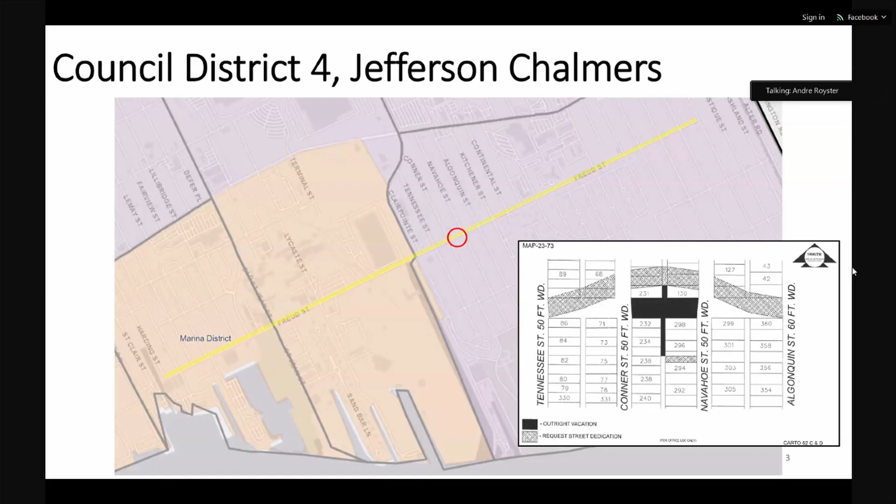Here's an aerial and zoning map of the area. The area is zoned primarily R2. To the bottom left of the image is the existing Freud pump station, also zoned R2. There's a former corner store near the intersection that's since been demolished, and another corner store to the southwest. This may have been a commercial node for the neighborhood historically, given that Freud is a collector between three neighborhoods.

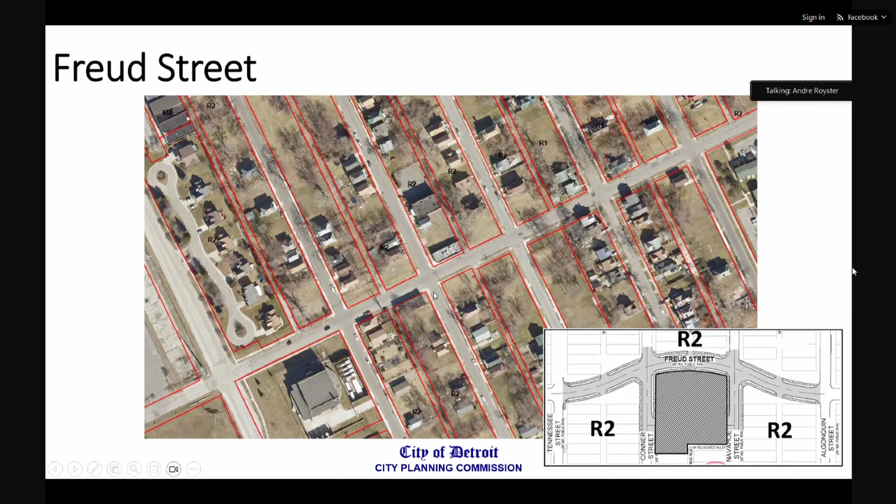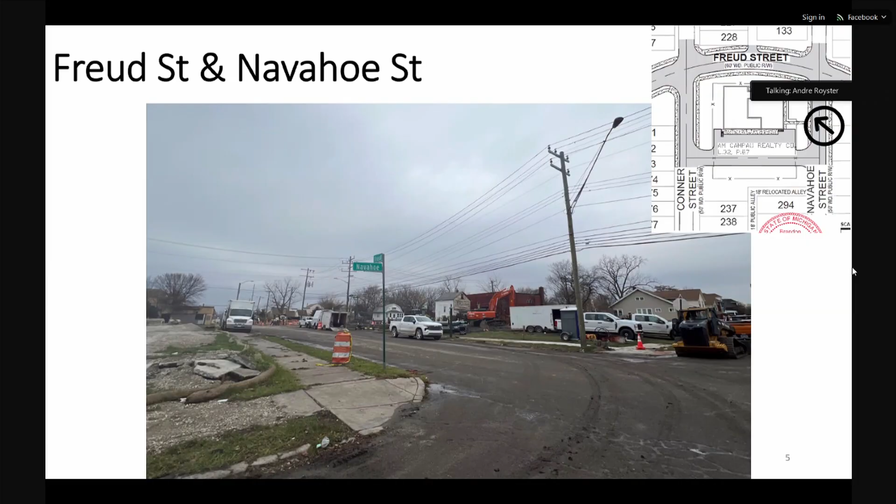Some images from November. This is looking northwest at the development site and the portion of the road that would be removed and rerouted to the north, where the trucks are. We understand that the work occurring in this area now is utility work related to the road reroute project, not specifically to the proposed pump station.

This is looking east down Freud from Clairpointe. This is the existing Freud pump station, showing that it's one block from the proposed pump station.

Quick background: the existing pump station was constructed in 1954. It's a combined station that manages both sanitary and stormwater.

There are existing parallel relief sewers below Freud Street in this location, coming from Algonquin to the north and Freud to the east. Because these relief sewers parallel themselves here, this is what's brought GLWA before you for the proposed development. That development would allow GLWA to do two things. First, and primarily, they would be able to isolate or block these two relief sewers from the existing pump station during dry weather so that the existing pump station can be maintained in service. And then the new proposed pump station would direct sanitary flow to the north down Navahoe to the Detroit Regional Interceptor along Jefferson.

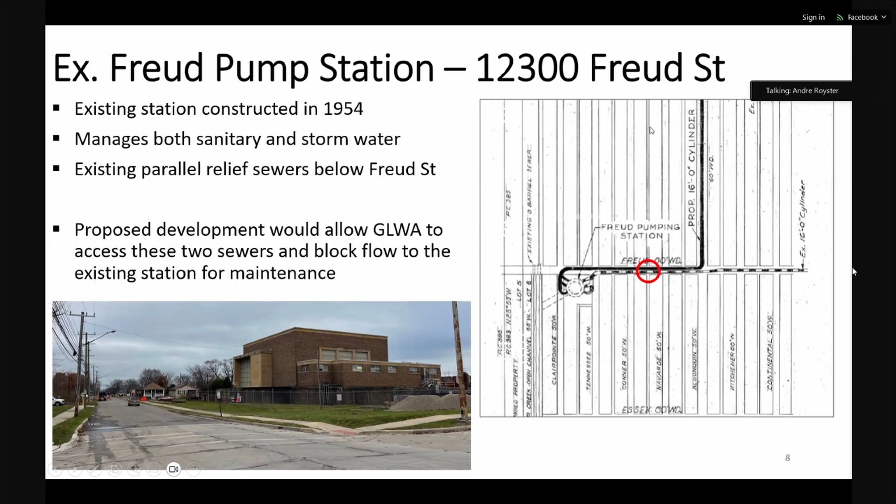So the zoning proposal is to rezone from R2 to R5. That's the first district that permits major utility pumping stations. If the rezoning is approved, conditional use approval would also be required, including site plan review.

Here's an image of GLWA's proposed site plan, including the rerouted Freud Street and site improvements, with quite a bit of greenery surrounding the immediate site. The building would be oriented to the west towards the existing pump station and would be 47 feet tall.

There would be a fenced parking lot to the south, as well as bioretention along the perimeter and fencing around the site. It's unclear if these off-site improvements, the street trees and the landscaping, would be installed by GLWA or the city. At the last meeting, it was discussed if there's an opportunity to add a small park at either end of the development. That would likely need to be pursued by a city department rather than GLWA, so that can be discussed further if desired.

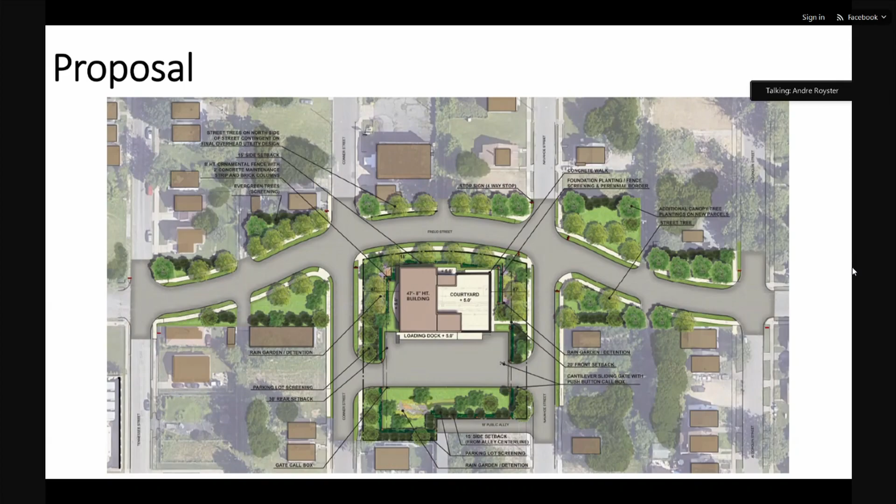During the vacation reroute process, there was significant engagement done by GLWA, with a focus on the building design. The images on the left are a previous building design that was proposed, mimicking the existing Freud station, and on the bottom right is a later rendering from this past summer with more brickwork and facade changes. We understand these are still working elevations.

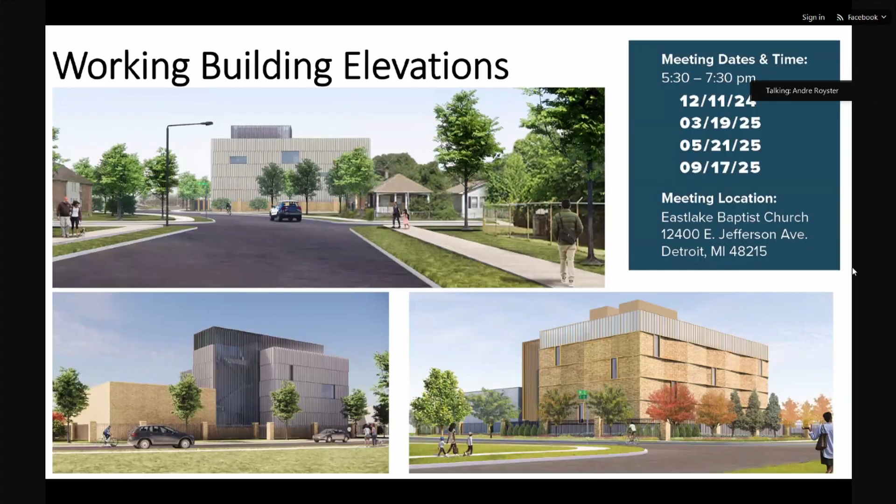GLWA has had a series of ongoing meetings. They had a meeting this past December 11, and they'll have another community meeting on March 19. So we provided a status report to the commission. No staff recommendation is provided at this time.

There were two main points of discussion in November: first, if the proposed location is the only option for the project, and second, how the proposal would help mitigate flooding. GLWA will hope to address these two items in their presentation, and a reminder that they've stated there's a need for the proposed pump station to be as close to the existing pump station for effectiveness.

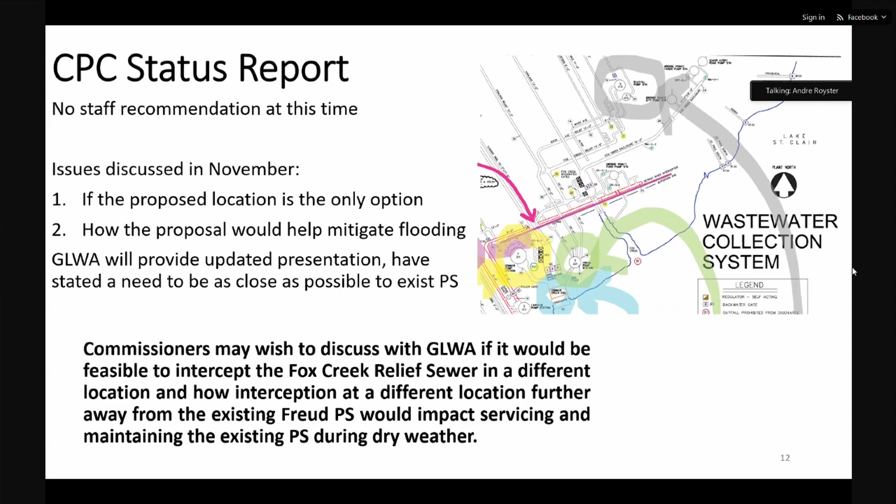In our status report, we have a prompt for the commissioners that they may wish to discuss with GLWA: if it would be feasible to intercept the Fox Creek relief sewer in a different location, and how interception at a different location, potentially further away from the existing station, would impact servicing and maintaining the existing pumping station during dry weather. So, looking at a little more detail along this train of thought...

This is a sewer map, so it isn't to scale or showing street locations, but is intended to show the system in more detail. Both relief sewers that the proposed pump station would intercept originate to the north of East Jefferson Avenue.

The Ashland relief sewer at the top, which I believe runs to 7 Mile, predates the Fox Creek relief sewer, which runs to the northeast.

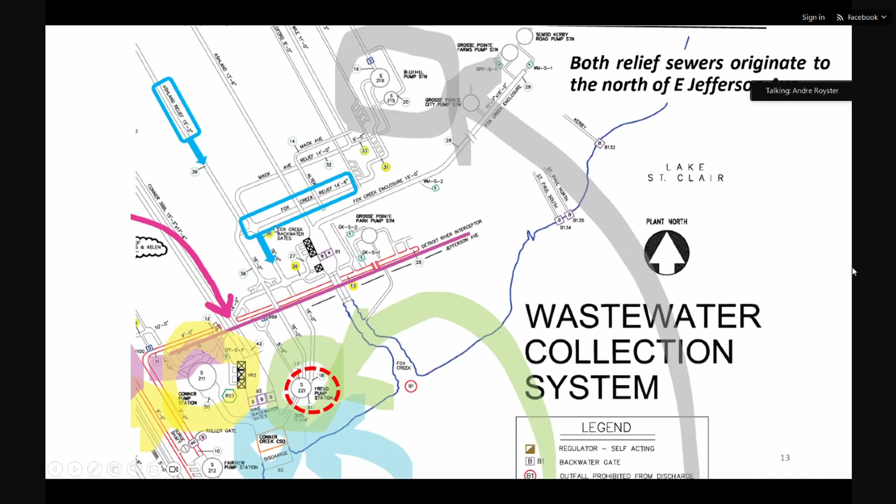There's an additional relief sewer called the Jefferson Avenue East Relief Sewer, which carries combined flow from the Ashland Relief Sewer, the Fox Creek Relief Sewer, and the Mack Avenue Relief Sewer via the Fox Creek enclosure. It serves as a collector point for these three relief sewers, and then takes flow down Jefferson Avenue to the Conner Creek pump station, shown with the bigger red circle.

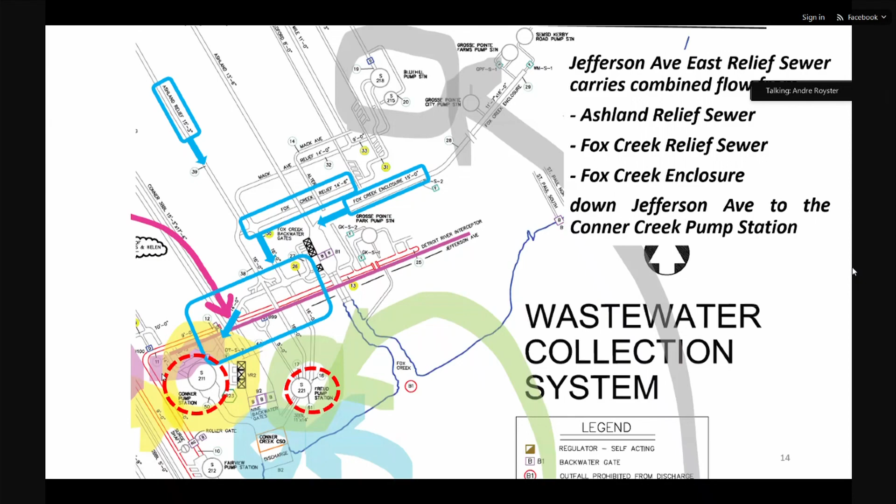We thought it might be productive to focus first or primarily on the Fox Creek relief sewer for discussion. This relief sewer flows first to the Jefferson Avenue East relief sewer to reach the Conner pump station, so it bypasses Freud under this scenario.

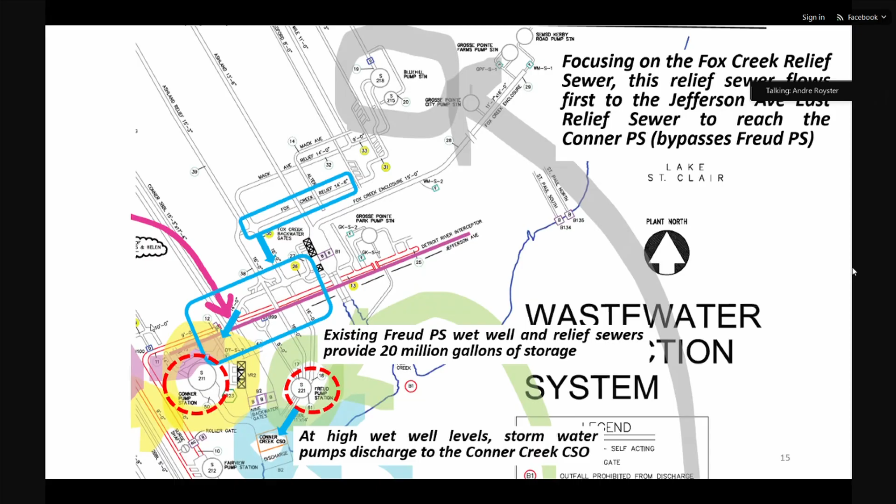A weir, or concrete wall, exists within the Fox Creek relief sewer where it meets the Jefferson Avenue East relief sewer. So flow, which would be stormwater flow during a rain event, must top this weir to enter the Fox Creek relief sewer that flows south of Jefferson. At this point there appear to be two options for flow: first to Conner pump, and then if there's a greater level of flow, it would cross over this weir to travel south of Jefferson, where it would then enter the Freud pump station.

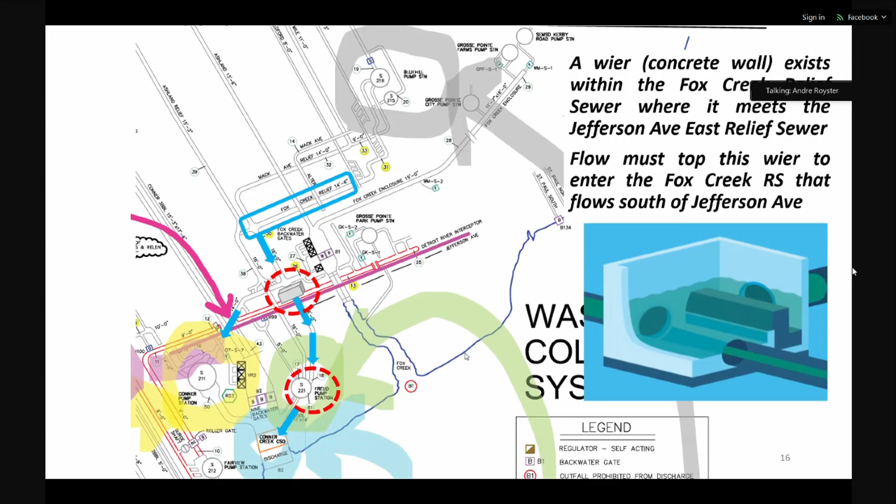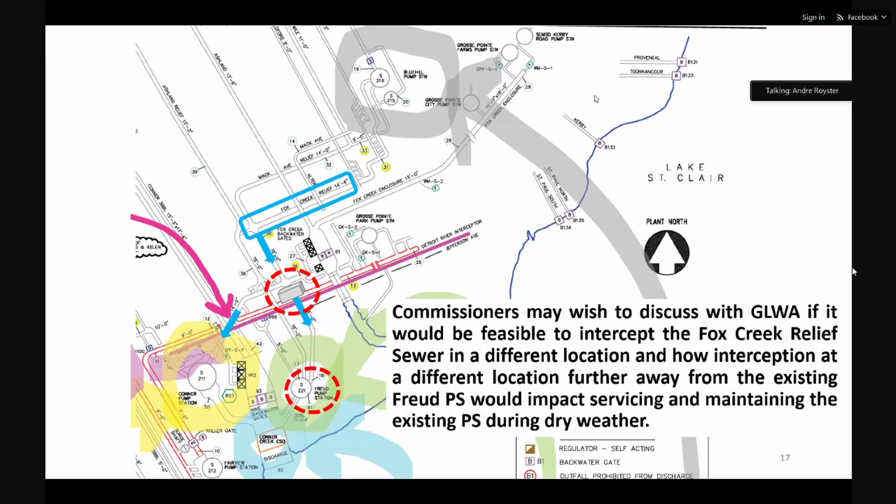So again, that's just a quick summary of our thinking with the status report. If that's something you'd like to discuss with GLWA, that's all I have, and we'll turn it over to GLWA for their presentation. Thank you.

Thank you. And if I can just ask a brief question, because this is R2 to R5 or PD, can you kind of go over the pros and cons and differences between those two?

Yes, we're not really focused on PD at this point. That would be something that would involve additional criteria, an additional level of review, but it's an option that's available to the commission if that would be desired.

And the main benefit of PD is that you can attach a site plan or development plan to the project, as well as conditions. With this project, with pumping stations requiring conditional use approval, that would be a similar opportunity, not through the commission, but through BSEED with the R5 conditional use. That would also include a site plan approval, and then they could attach conditions to the project through that process as well. But for master plan interpretation purposes, PDD only provided the interpretation for R5, not for PD.

So we could look to do that at the next meeting if you'd like. Okay. If others require it, I was just curious.

And then I know in the last meeting we talked about the vacation that I think is currently taking place. And in this alternative scenario, if we kind of get into that, how would that vacation that's already underway be impacted? Yeah, it's a good point.

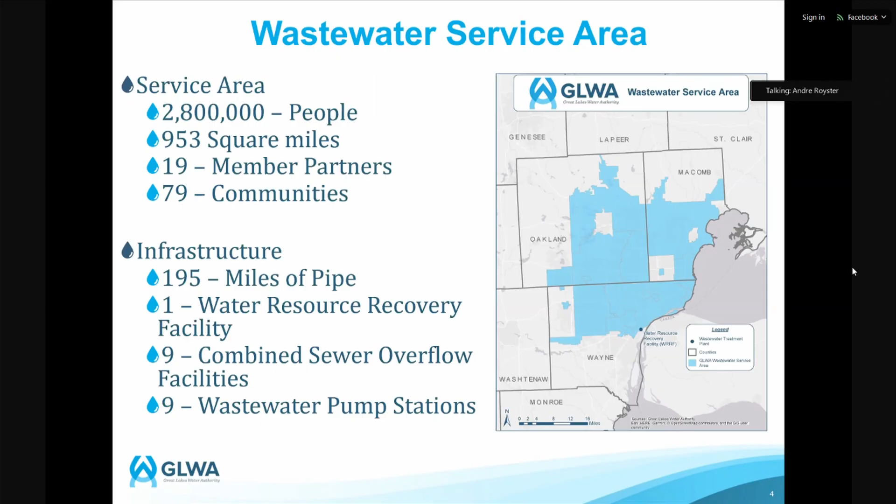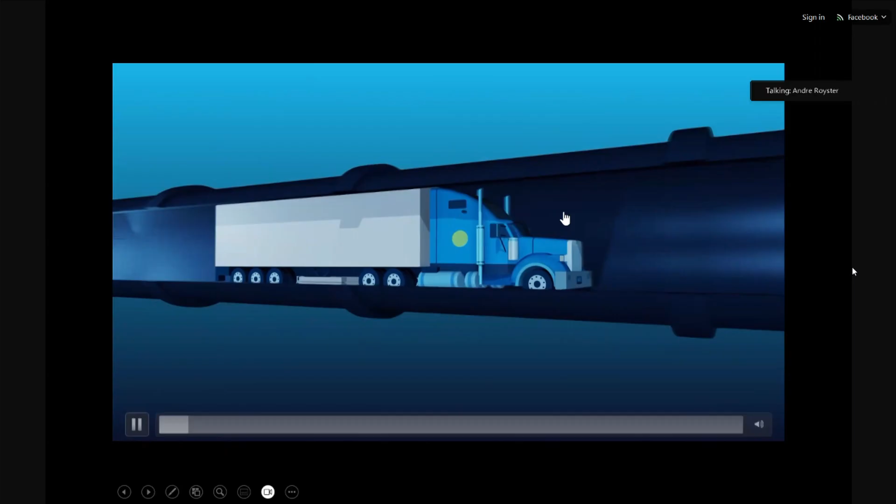You have some? Is the computer volume on? Is this a public video - is it located on the website or somewhere like that as well? We do have it on our website, accessible there. But you may have to stop sharing and then share again with sound so the music comes through.

While you're pulling that up. Oh, you got it. Okay.

Pipes are more than 17 feet in diameter and extend more than 195 miles. They are so big, you could drive a semi-truck through them.

When it rains... can you turn your mic? It might be your mic.

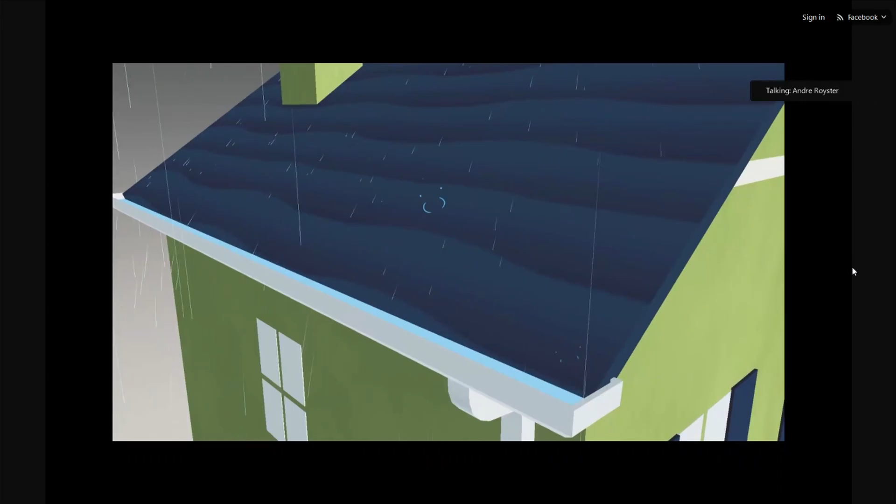Stormwater is rainfall that makes its way into waterways and also sometimes into sewer systems. The rainfall flows from the roofs of buildings and pavement, such as driveways, parking lots, and roads. It also flows over the ground when water is not absorbed by soil or plants.

A lot of older communities and metropolitan areas have buildings and homes constructed before the 1950s. These older homes may have connections that carry stormwater from the roof or groundwater around the home into a sewer lateral that flows into the sewer network. These are called combined sewers.

Modern homes constructed later than the 1950s don't combine stormwater with wastewater. Modern systems are called separated sewer systems. In separated sewer systems, stormwater flows through dedicated pipes directly into local rivers and streams and never mixes with wastewater.

Our regional system receives flow from both combined and separated systems, making it a combined system. Each day, the average flow of wastewater through our sewer system is more than 500 million gallons. So on normal days, that's the equivalent of filling up Ford Field approximately 1.5 times, and during large storm events, filling up Ford Field more than 5 times.

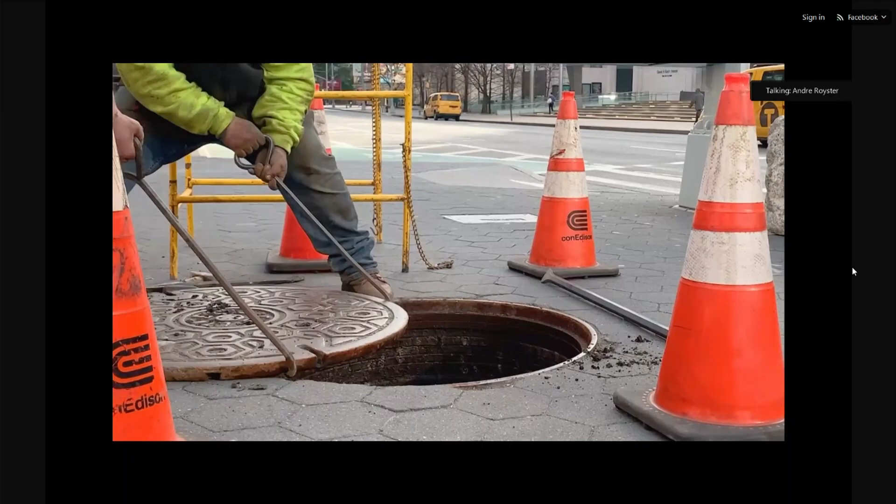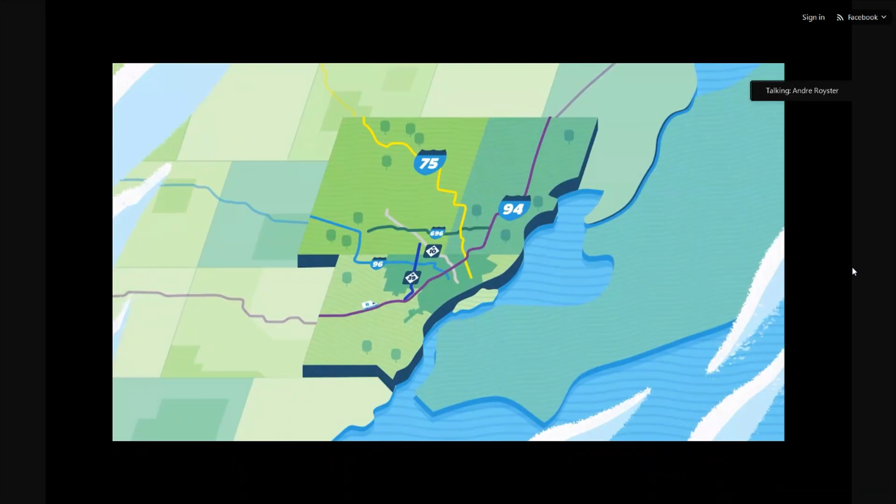The member partner communities within the GLWA service area maintain the neighborhood sewers. The only evidence of these neighborhood sewers may be manholes that provide access for workers to inspect, repair, and keep the sewers clean. The storm sewers that serve areas such as I-75 and I-94 are the responsibility of the Michigan Department of Transportation. The drainage from these areas flows to either natural waterways or into the neighborhood sewers, eventually making their way to the GLWA regional sewer system.

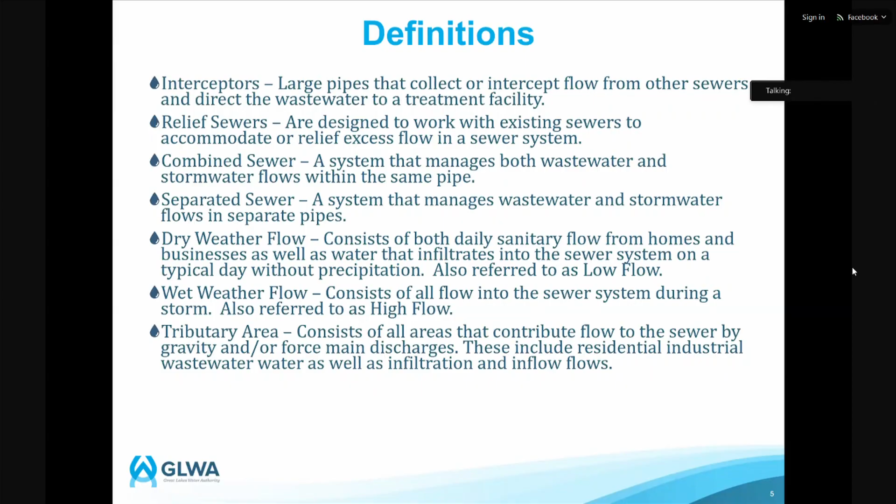So now to actually get into our system.

Looking at this slide, the tributary area we separated at the request of the commission — what is our separated system and what is our combined? The blue shading shown here is about 76% of our tributary area, which is separated. About 24% of the area, identified in red, is combined.

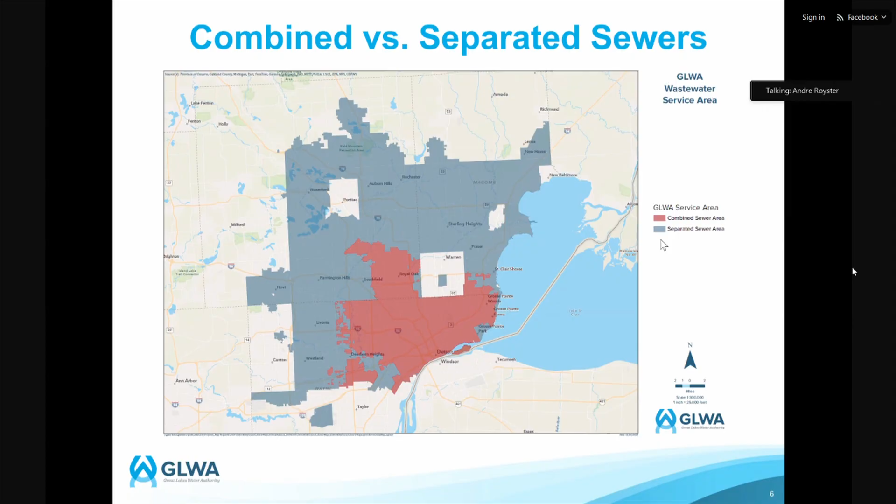What should be noted is that a significant amount of water that we receive in our system — approximately 80% of the wet weather that we handle in our entire system — is contributed by the 24% of the area that we service. So the rainwater from the combined systems is significant just because of the potential opportunities for it to get into the system.

Now to look underneath, what's happening underneath the ground: we collect flow through 3 major interceptors to serve those 2.8 million people that we had identified. The interceptors, as I indicated in the definition, are what collect the flows from the lateral sewers.

What you see in the graphic, the green lines are not roads and streets, although they run very commonly in parallel within the right-of-way. Those are sewers managed by DWSD, specifically in the yellow shaded area, as part of the Detroit system. Those have interconnections to the regional system, shown in the 3 red lines, which are the 3 major interceptors that collect flow and bring it down to the centralized facility.

The far right is the Detroit River Interceptor, the Northeast Interceptor, and then the Northwest Interceptor. Additionally, this graphic shows specific locations where communities outside of the City of Detroit only have one or two connection points where they enter flows into our system. The majority of the City of Detroit has multiple connections because of the way the infrastructure was built, but outside communities are only introducing flow at specific points within our interceptors.

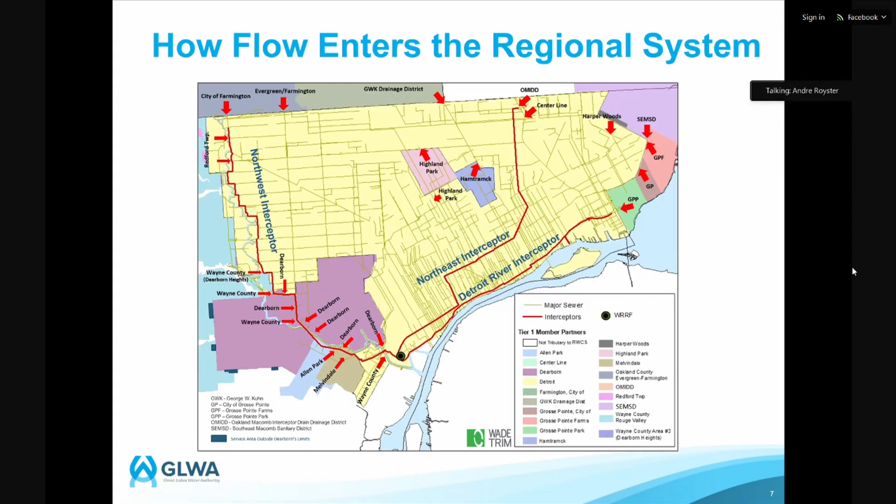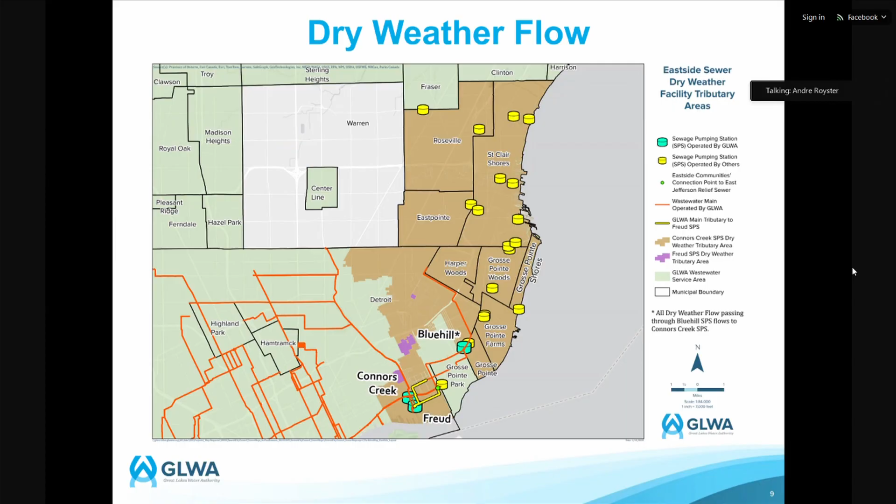In addition to this map, what you see here is the dry weather flow contribution. There are 3 major pump stations that Great Lakes Water Authority operates within the east side: Bluehill Pump Station, Connors Creek Pump Station, and the Freud Pump Station. All these pump stations have a sanitary component and a wet weather component, which we refer to as storm component.

The reason you don't see a shading color relating to the Bluehill Pump Station is because what Bluehill does is lift flow from a low point area and discharge it to the Connors Creek Pump Station, which then pumps it down to the Water Resource Recovery Facility. That's why you see two color representations of dry weather flow. The brown represents what goes to the Connors Creek Sanitary Pump Station, while the purple, and this is where we're getting to the specifics of the purpose of this project, represents what is contributing dry weather flow as it relates to residential or industrial usage to the Freud Pump Station.

All that flow is coming in 24/7 - rain or dry, that volume of water is coming down the pipe.

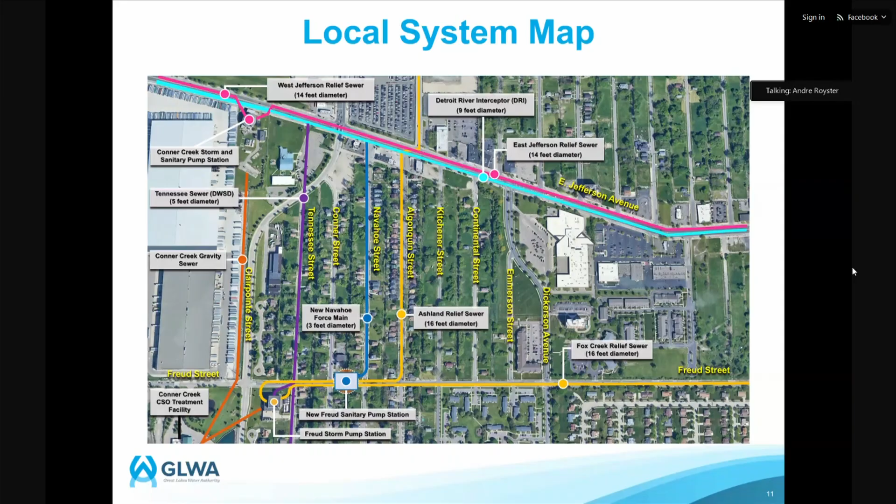Just a couple more things to cover on this - the Conner Creek pump station that we showed you runs along Jefferson, identified in the upper left of this graphic. The Conner Creek CSO is in the lower left of this graphic - that's the actual treatment facility that receives water from both pump stations. I also want to emphasize that the Conner Creek Sanitary is the rectangular building that many of you may have driven by many times, located between Jefferson and the circular building that's on Jefferson.

So as part of our discussion at our last meeting, there was a lot of discussion between floodplain and flooding, and I thought this is a good opportunity for us to have that conversation. To clarify, the graphic you see here is the FIRM map - flood insurance rate maps developed by the Federal Emergency Management Agency, FEMA, a federal agency. GLWA has no connection with this federal agency, other than that we utilize the maps to do our construction projects or activities.

In October 2021, the FIRM maps that I will refer to were updated for this area. This project had initiated back in 2014. Wayne County works with FEMA directly to do FEMA map updates. FEMA maps are a representation of areas prone to flooding or potential for flooding, and this is what's used to establish insurance maps and rating for that.

What's utilized to inform this map is river levels, shoreline flooding, coastal flooding, and elevation. So the terrain, the area that is surveyed, is what establishes what a floodplain is.

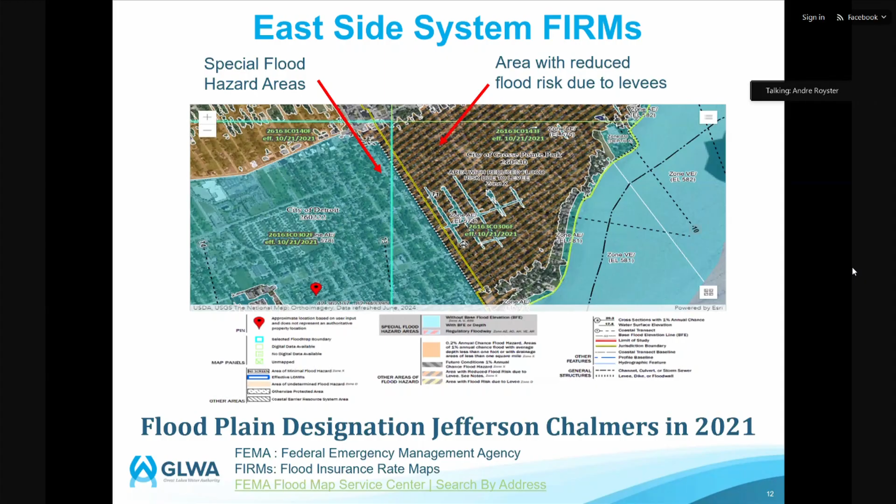FEMA, as I indicated, takes into account coastal flooding. They do not account for any storm water or rainwater event, what we refer to as pluvial flooding. In addition, I contacted the state representative - we can share their contact with the commission - as it related to whether they included the water levels we experienced in 2019 or 2021, when the river levels were significantly high. Their response was no, they did not account for that because they simply look at modeling results and topographical mapping of the area to determine if it's in a floodplain or not, and if there's protection from levees. So I think that's an important thing to note.

So as we get into alternatives, and we heard the alternative that was proposed, I go back to what dry weather is. As I indicated, there are two sources: one is infiltration/inflow, and one is the usage of used water that comes into our system.

The first alternative we looked at, which would have been the most preferred alternative for GLWA, would be to construct isolation chambers as close as possible to the Freud pump station. We are actually doing this alternative at the Conner Creek storm pump station, which is most preferable because it's the least amount of pipe between the pump station and the isolation, minimizing the potential of water getting into the system, which allows us to safely access the pump station and do the necessary maintenance. But unfortunately, as I indicated in the dry weather graphics, there is the purple area that has flow coming in 24/7 to this location.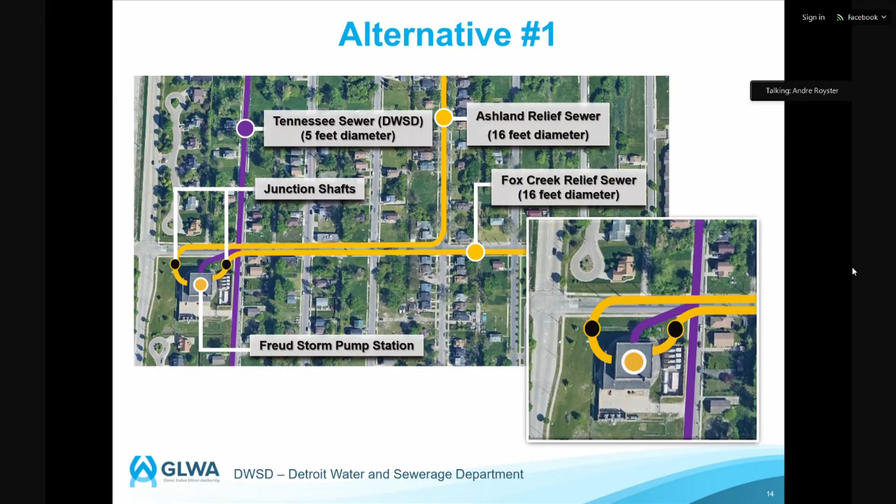In addition, the farther back we go, there's more potential for groundwater infiltration into the pipe. We do sewer inspections, we go out, we do injections - just like you would get somebody to come crack-inject in your basement. But when you have a 100-year-old or 150-year-old basement, there are a lot more cracks and joint separations, so water infiltrates these sewers. No matter what we do, there's still water introduced into the system that puts our facilities at risk, so we can't access the facilities.

This alternative was not found feasible because we would need a pump station somehow to take the water out. Otherwise, we would be backing up homes, because there's no way for that water coming in 24/7 to leave the system.

Alternative 2 was to install a pump station adjacent to that isolation chamber. Keep in mind, one other thing I didn't mention on alternative 1 - there was a concern about engineering construction, as you can see we're showing those lines as curves coming into that pump station.

Unfortunately, and impressively, in the 1950s they truly did construct those pipes with those massive curves. Our structural engineers and designers at the time were not comfortable installing isolation chambers right on a curve. There was risk associated with that, and that was also one of the drivers that eliminated that alternative.

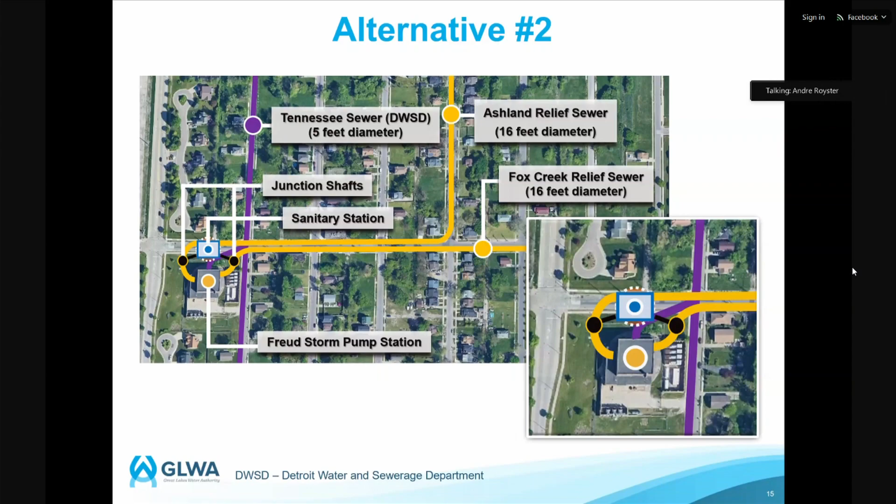We identified a pump station being constructed adjacent to our pump station, minimizing the footprint and reducing encroachment into the community. But unfortunately, if we had constructed this facility there, we would have had to close Fruit Street in its entirety, because of the community just north of that and properties being utilized there. We would not be able to effectively reroute Fruit Street around the pump station if we constructed it that close. Ultimately, this is the alternative that was selected.

However, the team worked with the Land Bank to find properties that are available, ideally within the reach between the areas shown where the two interceptors run in parallel, so we can construct one pump station.

And then finally, the last alternative we looked at was installing new interceptors, relief sewers. These would be massive sewers constructed 60 to 80 feet underground to a new mega pump station—as I explained how big these pump stations are—along with additional interceptors.

This project's cost was over $1 billion, and it was not feasible. It was recognized that the funding for the sewer system is 40% City of Detroit. GLWA is very cognizant, and our board members remind us regularly how important it is to stay affordable as we do our projects and services. So if we were to construct something that expensive, it would be burdened 40% by all City of Detroit residents.

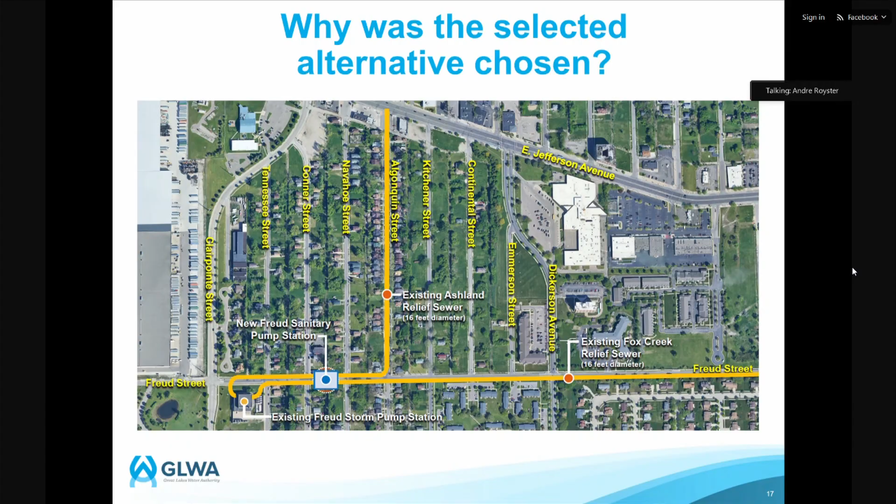These slides you're familiar with, but I'll quickly go through them as a reminder. To give you perspective, I already talked about the size of the pump stations. But when it comes to the storm pump station versus the isolation pump station we're constructing just upstream of it, if you look at the differences between the two, the existing pump station is a 2 billion gallon pump station, while we're constructing a 30 million gallons per day pump station.

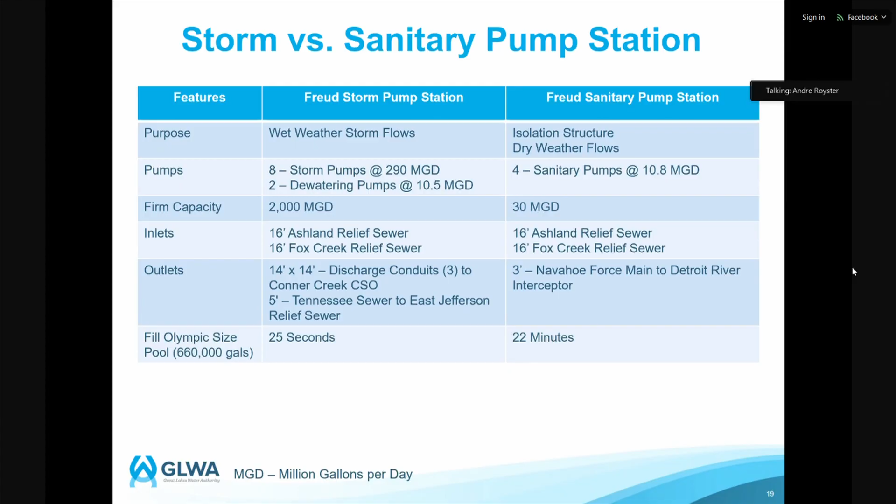Although here it looks relatively small, I'll tell you as someone who has run other communities, a 30 MGD pump station is still pretty large—some communities would consider this their largest pump station. For us, unfortunately because of the size of our system, it's simply an isolation rerouting pump station. To give perspective, we wanted to show how long it takes to fill a swimming pool—you can see the difference between 25 seconds versus 22 minutes.

I also wanted to address odor concerns. We have 4 pump stations in this area, but I wanted to highlight the 2 specific to this location. One is the Conner Creek Sanitary Pump Station that I referred to, which had a pretty large brown tributary area. That pump station is close to 5 times the size of the one we're constructing, and it is significantly shallower than the pump station we're building.

We have reached out to the City of Detroit, looked at the records, and have not had any odor complaints at any of these facilities. I will emphasize that at a recent community meeting, as I was walking out, a resident approached me about odor they were experiencing at that moment in the parking lot of East Lake Baptist Church, adjacent to the pump station. The odor emitted was more of an industrial smell—there's a unique odor to wastewater.

It is more sulfur-like, and that odor that we were experiencing at that time was definitely coming from north of Jefferson. It was not coming from our facility.

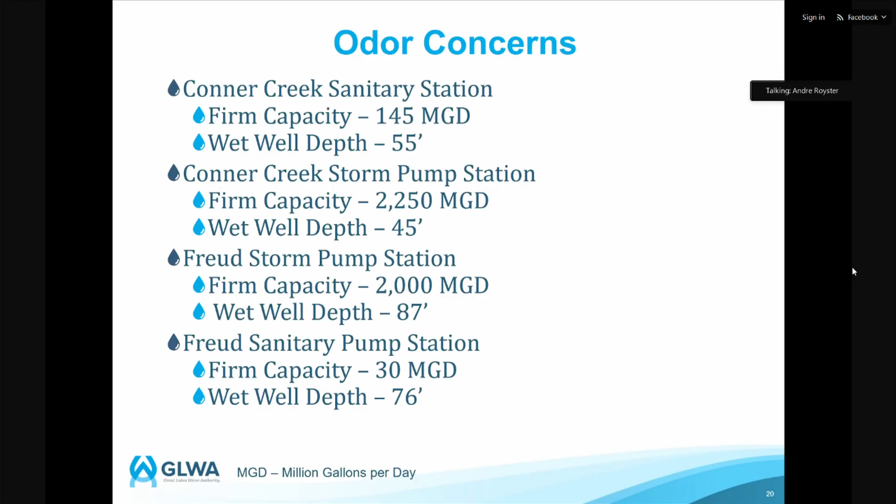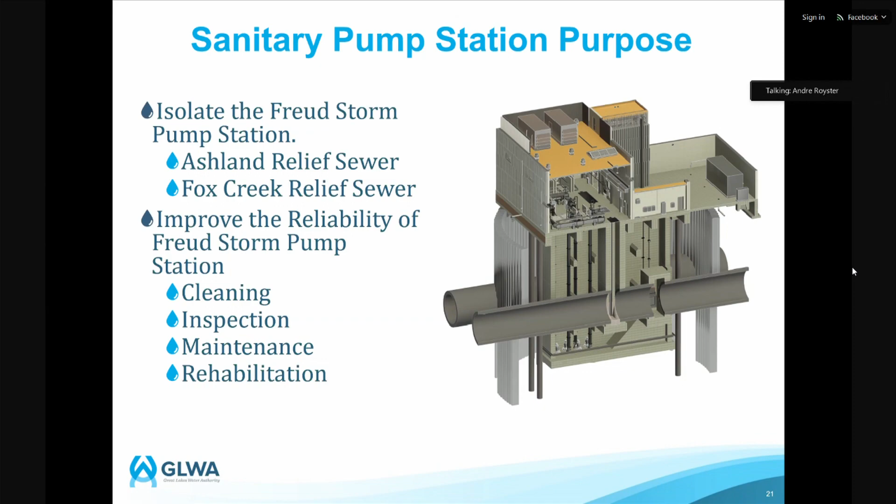So I did want to emphasize this pump station as it relates to the depth, scale, and size. This graphic shows the profile of the pump station where we intersected the two interceptors. We're going to be doing this so that we can clean, inspect, maintain, and rehab the storm pump station, which is the ultimate pump station that we have to utilize to protect the low-lying communities.

This again is a highlight of the parcels that GLWA acquired during this process to be able to construct the pump station.

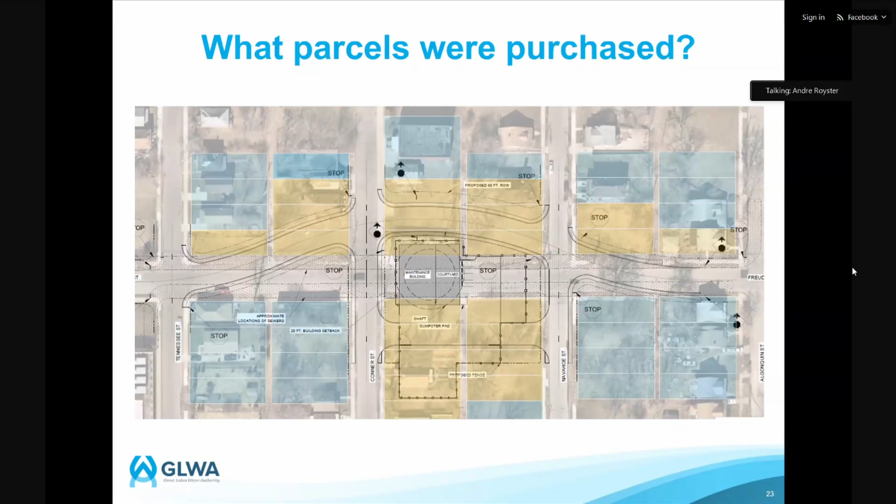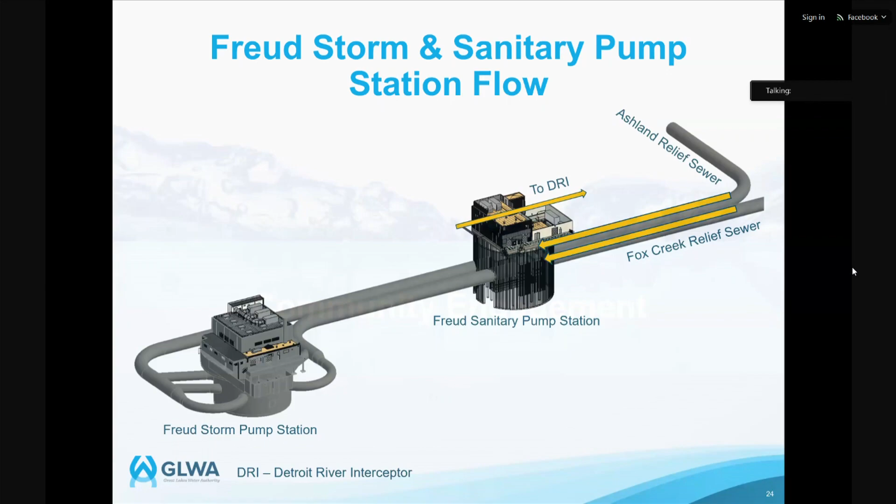And then finally, I want to talk about our commitments. We experienced, as Great Lakes Water Authority, constructing a new pump station, as I indicated before. This is not something we do regularly. This is not something we like to do because it costs us a lot of money, and we like to try to keep the rates down as much as we can. This is burdened by the ratepayers of the system.

But unfortunately, we did not do as much engagement as we should have, and we have committed to that. During the safety planning, we recognized the lack of engagement that took place. Council members assisted us, and we worked with them to develop a community engagement plan and methods to better engage with the community as we progress on the project.

We committed to quarterly community meetings that was identified, and we continue to do that, and we will plan on doing that. I believe we have 3 more remaining in this calendar year. We plan to do the same in 2026 and 2027 until the completion of the project.

We are utilizing a mailer system and door hangers to communicate with local residents on any issues that are coming up, keeping them informed as the project progresses of any activities happening. And finally, we have developed a website with a hotline so that residents can reach out and voice any concerns, and our team and Paul Ransom, our project manager, responds immediately.

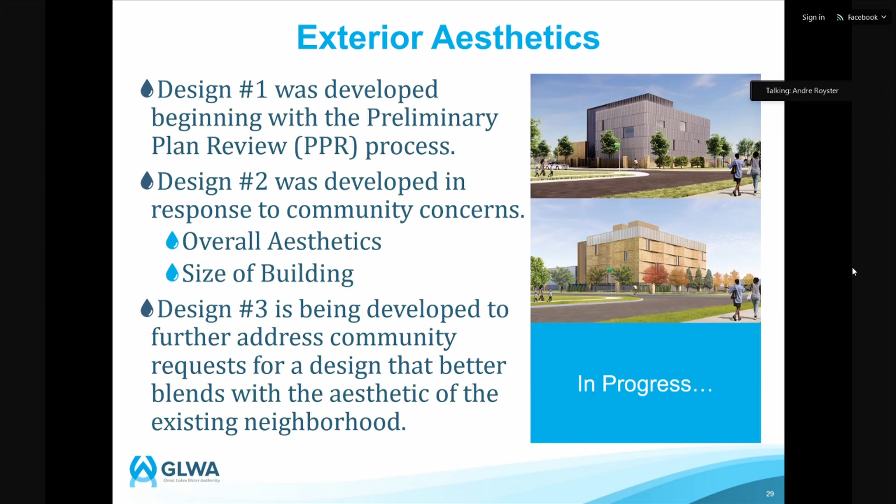An alternative facade was proposed based on color schemes in the neighborhood, but still we received comments from the community that they are not happy with either of those. GLWA has committed, just as we committed to public engagement, to work with the local community to find a facade that meets the neighborhood's desire while not losing the functionality of the station. We have to maintain the functionality of the station, otherwise it would not be an effective facility for us to operate and successfully do the service we need for the system. At this point, I will turn it back. That concludes my presentation.

Thank you for that very detailed presentation, and thanks for bringing back a lot of that information that commissioners asked about. I know there was probably some difficulty defining that information, so thank you for doing that. I do have a couple questions. Mr. Frassini, if you could just assist.

As it relates to the vacation and the areas being rezoned, can you bring that information back and graphically show that? Because narratively we have all the addresses and parcels, but I'm curious what that vacation looks like in terms of the boundary related to the areas we're actually rezoning.

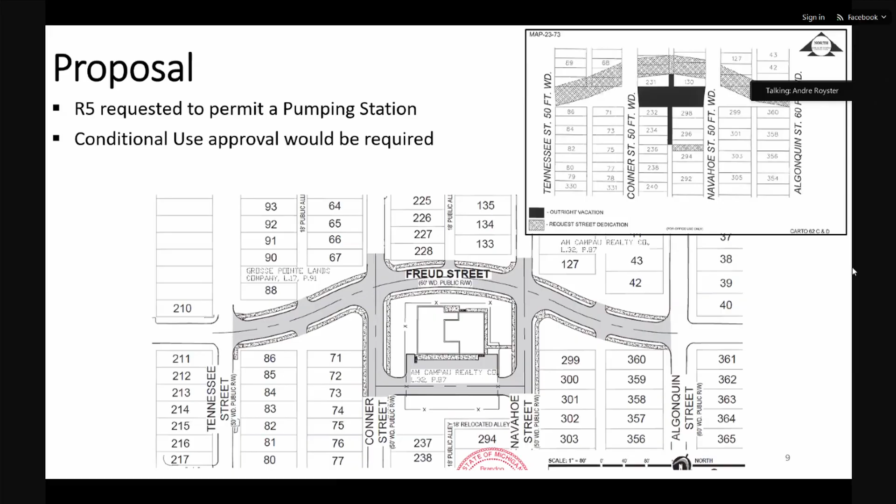Eventually, at some point, should the road physically be rerouted and dedicated, that's the goal. Are you making new right-of-way to the north of the new configuration? Correct, that would be a new dedicated public right-of-way, hatched in that bend to the north.

Are any residents getting additional land or not? I don't believe so. I don't know if the applicants can speak to it, but that right-of-way vacation process is managed by DPW, and we can reach out to them for that question, but I don't believe so. Okay, that answers all my questions.

Last question, regarding this item—I heard there's no staff recommendation at this time, so I'm assuming it's going to come back later. Is there an expectation to continue the public hearing? That's always up to the commission. We typically don't provide recommendations until the public hearing is closed, to make sure we have all the feedback. So if the public hearing is closed, we would likely bring a recommendation at the following meeting, whether that's closed tonight or remains open for a future meeting.

Okay, sounds good. I have no further questions, fellow commissioners. Commissioner Lewis, going down the line, Commissioner Udabi, in that order.

Thank you. I have a very brief question. I understood you to say that the Freud sanitary pump station would allow you to work on the Freud storm pump station. Is that correct?